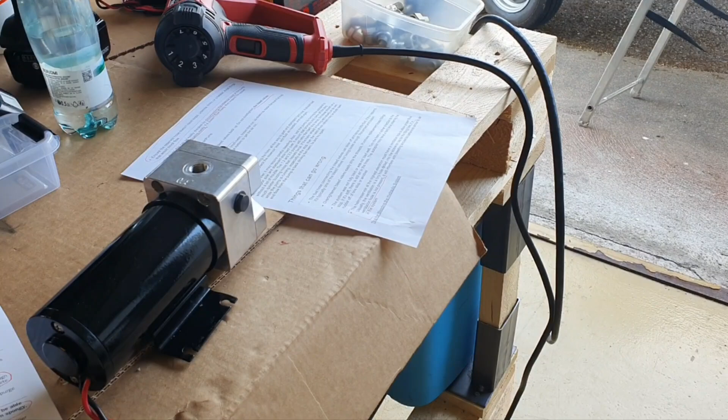Two options, that's it. So I will show you unique, let's say, content. I don't like to call my video content because I share really good information for free. So, content from different manufacturers of the pumps, and also about the rig I did myself for easy bleeding.

So let's go. At the moment I have several videos in this playlist. I'm still talking about the subject, so listen. For example, if you don't have autopilot, you just have a steering system, I have a video where I tried with the basic SeaFirst user manual procedure, and I didn't succeed. So it's quite a bad procedure in the SeaFirst manual.

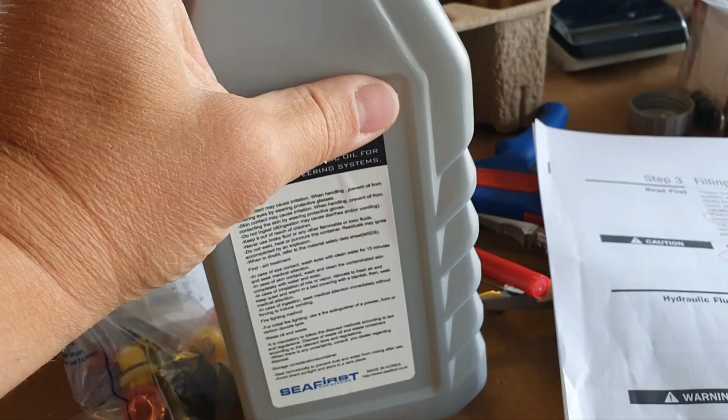And I found that it should have been done quite differently, for example, when you read the SeaStar procedure. Anyway, it didn't work. So you can watch that video. Probably you have the same problem.

The second procedure was when you rotate the wheel until the lock, and then poof, and the air goes up. This procedure did help me to remove the air, and everything worked perfectly. So if you don't have autopilot, probably that will be enough. Also watch that video. I don't remember the names, but you will see them in the playlist with this one and in the description, I believe.

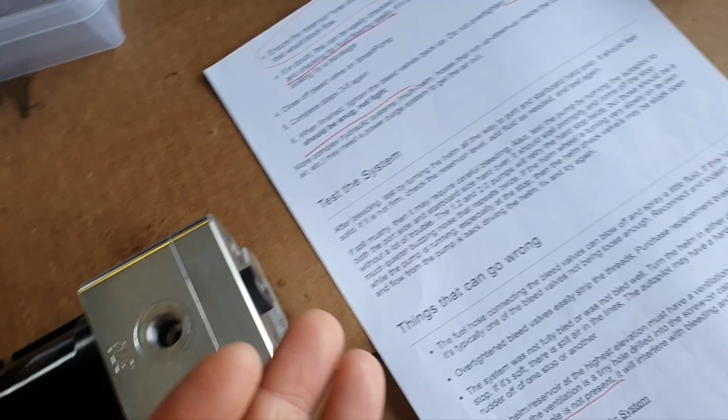And now we are talking about the third option, where I decided to build bleed valves on the pump, this is a Raymarine or Hy-Pro Drive pump, myself. For example, some SeaStar pumps have bleed valves. And I decided I will do my own, as well as rigs for easy bleeding, and that's what we will consider, but we will consider even more quite important stuff.

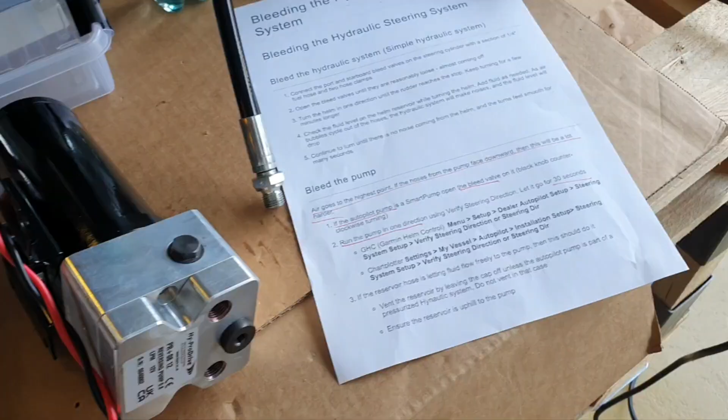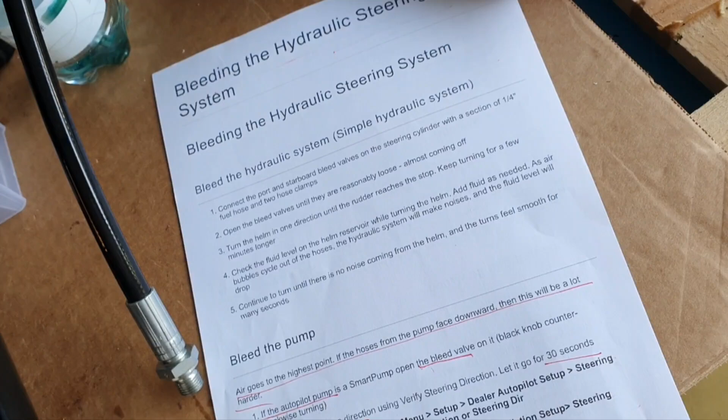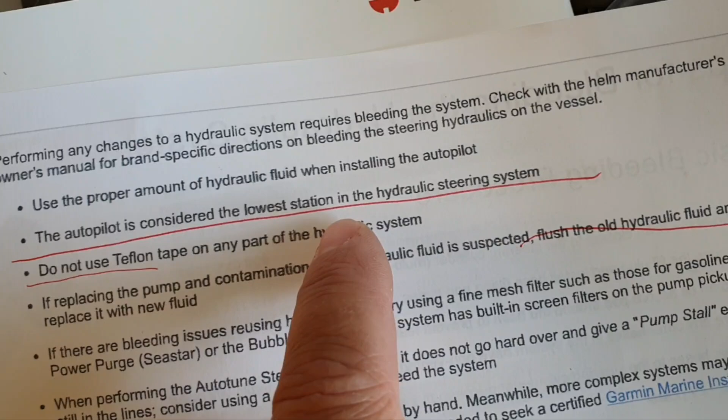As I mentioned, I collected experience from different manufacturers. This is from Garmin, this is from SeaStar, again from Garmin, and some advice from the manufacturer of the pump that I haven't seen in any instruction. First of all, the interesting point: in multiple station systems, start with the lowest station. That is SeaStar, and then we read in Garmin that the autopilot is considered the lowest station in the hydraulic steering system.

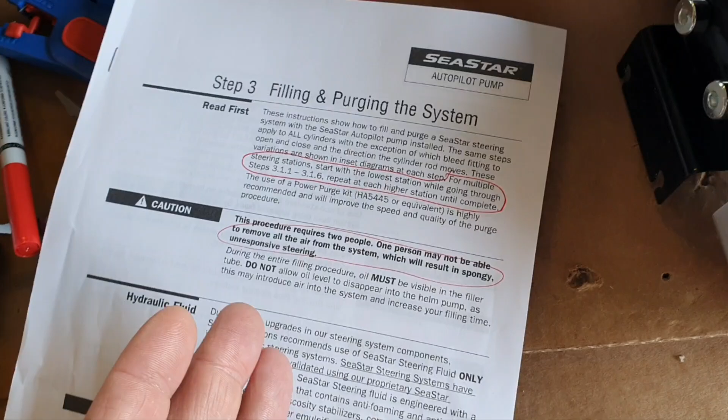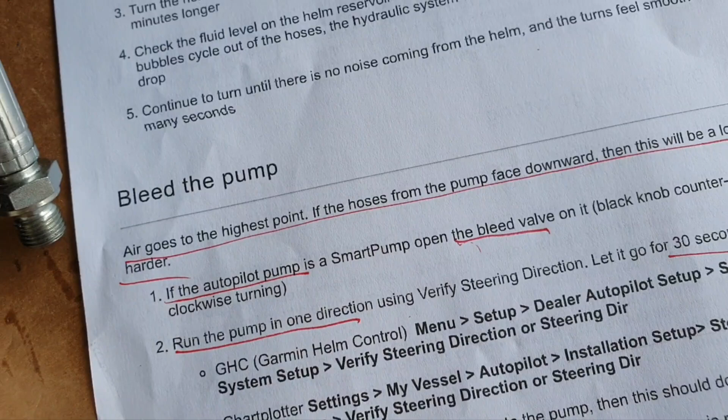So could you combine these two facts? We should start bleeding from the autopilot, and SeaStar has bleeding valves, this one doesn't, so I want to build my own. Okay, the next interesting point. Air goes to the highest point. Everyone understands this, but that's quite interesting. If the hoses from the pump face downward, then bleeding will be a lot harder.

In my initial design, if you watched the previous video, you have seen my installation was like this. The hoses go that way. It means that if there is some air here, it needs to go down before it goes up. It's much harder. So in the new system, I'm building the hoses something like that. So two quite important things.

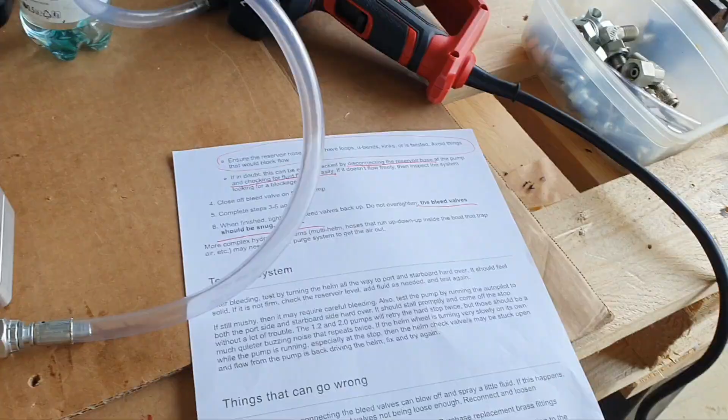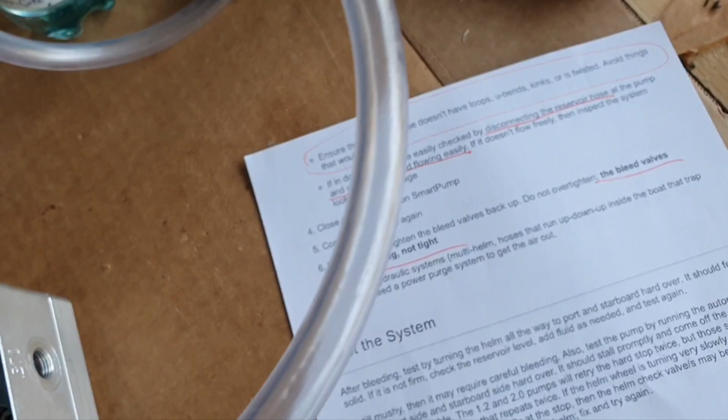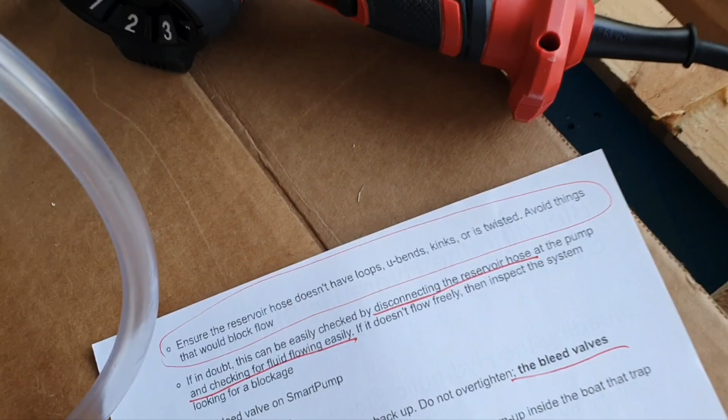Guys, I think you know about the reservoir line. It is in every instruction, and this line is not pressurized. This time I decided to use a transparent and bigger diameter line. We rely on gravity here. The liquid from the helm pump goes by gravity to here, and in any instruction you will see: ensure that this line doesn't have any loops, bends, etc.

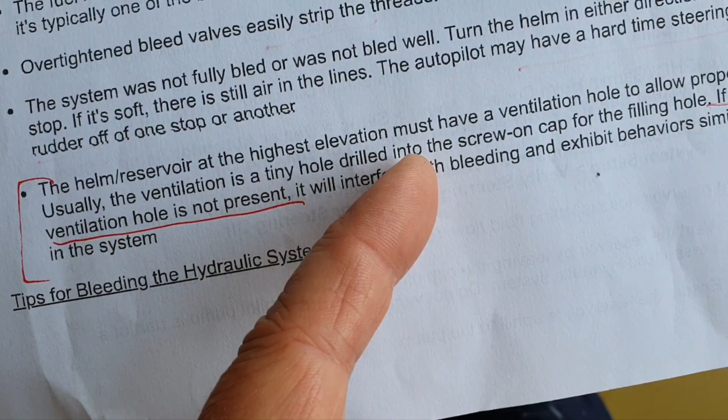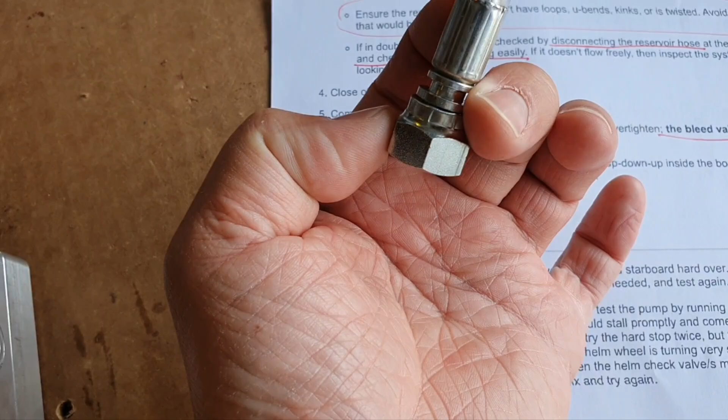This pump is convenient because you can change the position of the reservoir line, and I changed it here, so I will have a good line. And Garmin also recommends how you can check it. Oh no, not that one, sorry. Here, you can disconnect this hose and see if fluid goes easily. So I will disconnect here, and then I will see that everything goes from the helm pump. We will see. More things.

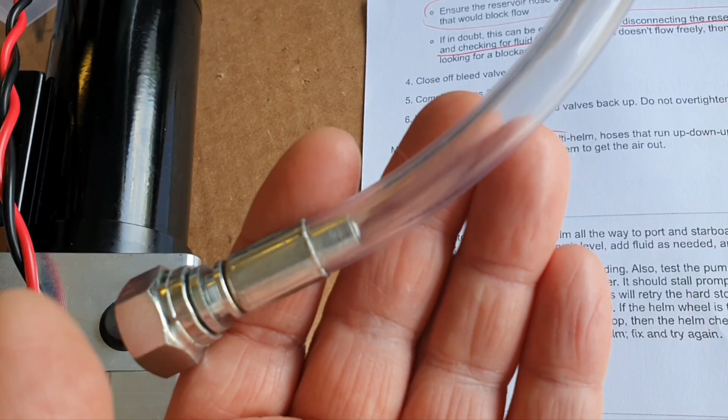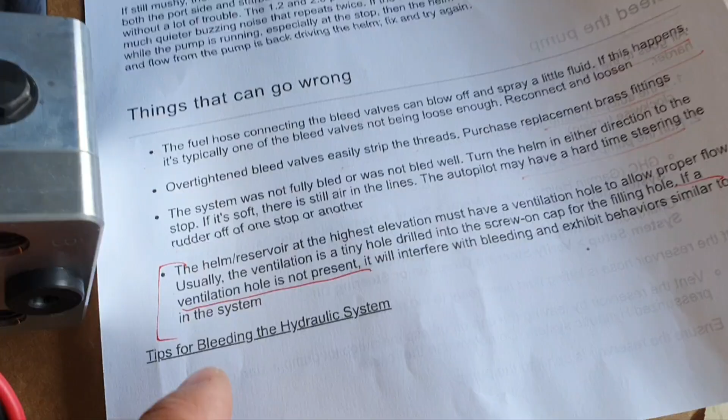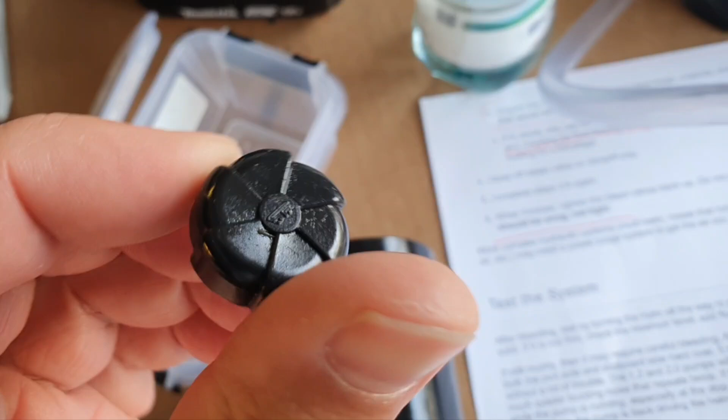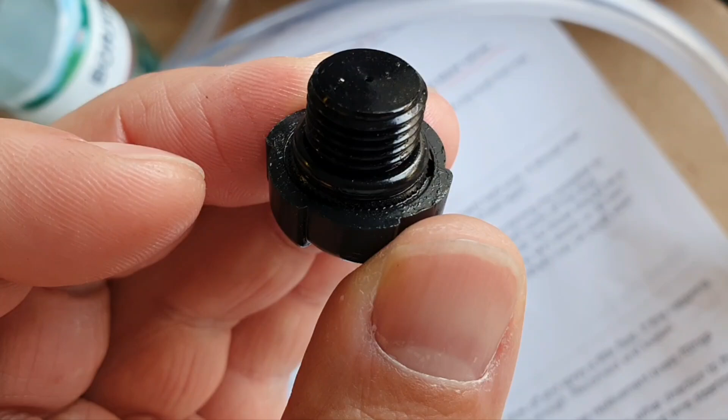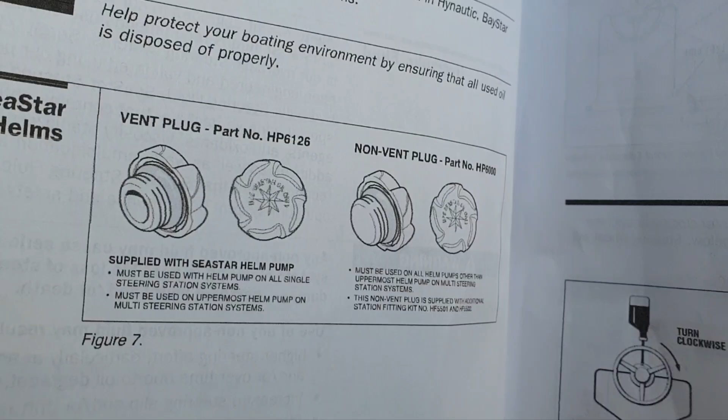No, not this one. So, guys, next: the highest reservoir should have a ventilation hole, and SeaStar supplied it with this cap. The hole is not here, that is the hole, and you can see it on the sides in a few places. So this is ventilated. It should be just on the upper station, not on others. On other stations you should have caps without ventilation. SeaStar also mentions this. It's very important.

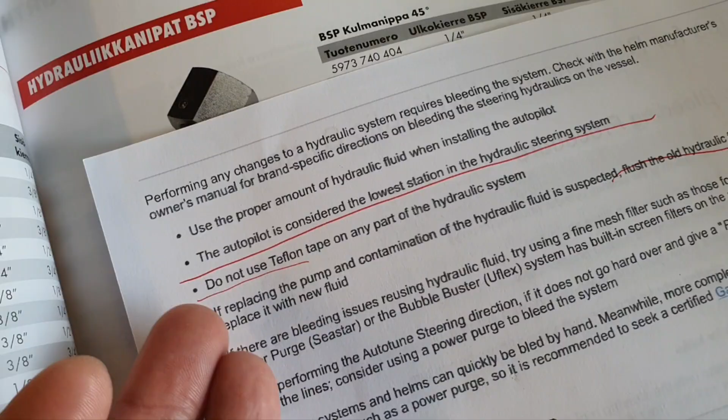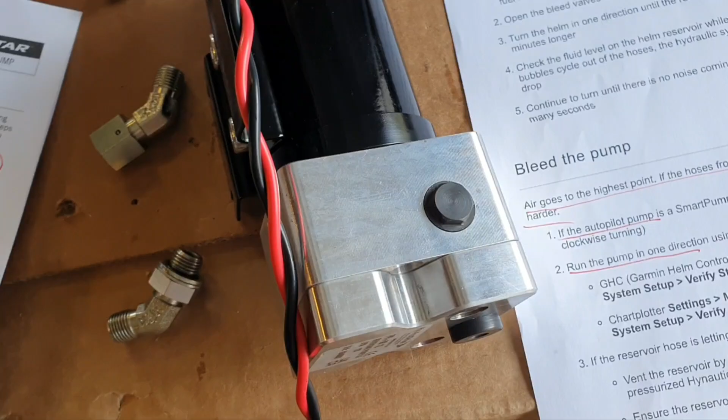Guys, one more. Again and again, don't use Teflon. Forget about this. You should just forget about this stuff. So look, guys, for example, in the Garmin procedure you read to open bleed valves on the autopilot pump, there and there. In SeaStar you also read about the bleed valves. You don't have it here on this Raymarine or Hy-Pro drive. So that's why I built my own, and I will show you now how.

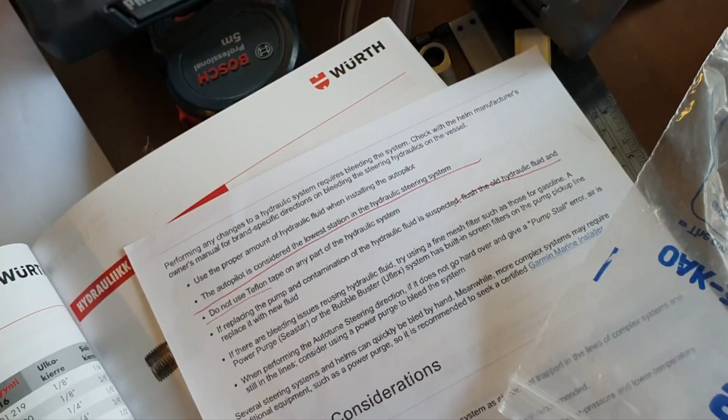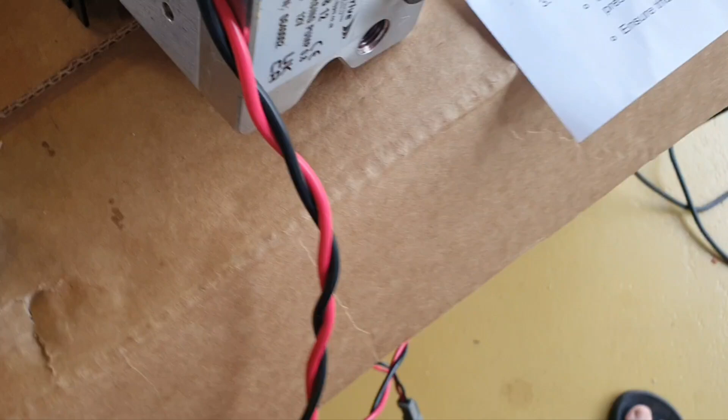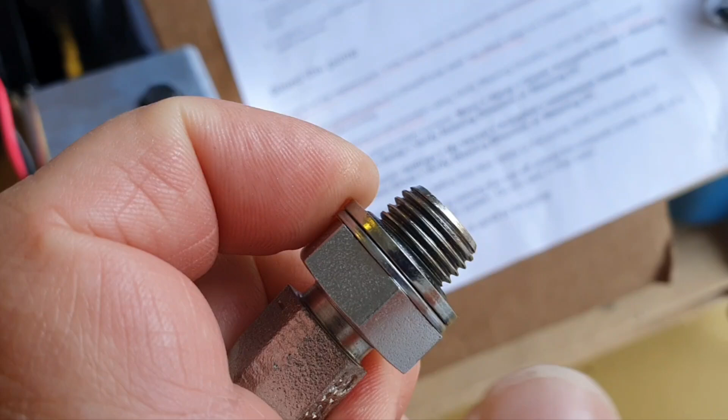So it is BSP 1/4. You have different kinds of fittings for this, but they are restricted to some common fittings anyway. You can get anything, and basically the sealing is happening metal to metal with this cone shape. So it's here on the hose and here, or in any other part, for example here. So you have several options. Or in case of the flat surface, the sealing is with this bonded washer, and there is also a cone there on the thread.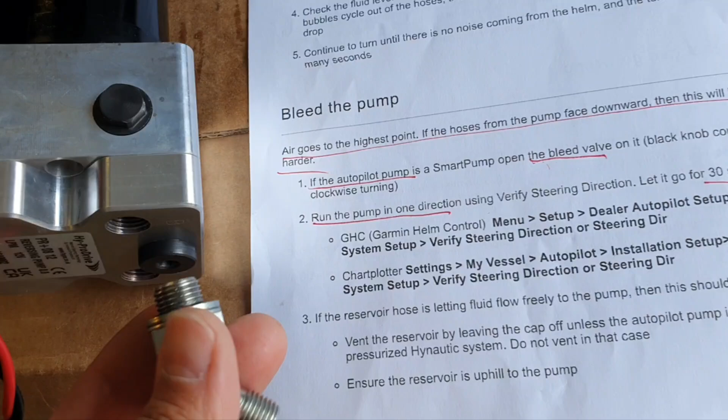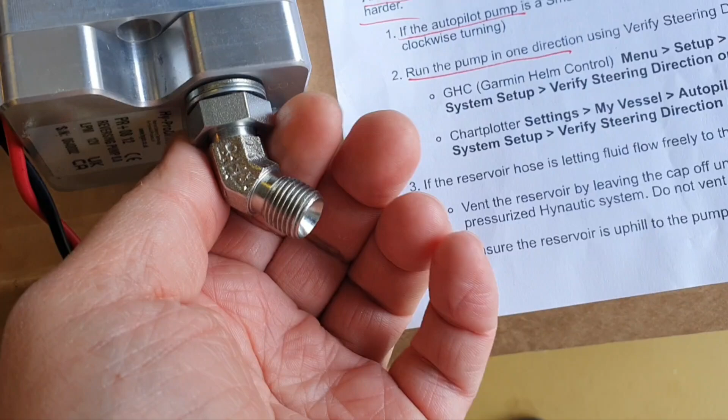So we should first start with a sealed connection from here. Here we can only use a bonded washer. How do we start then? We don't want any hose directly. So we start with either 45 or 90. 90 is bad, it's always bad. So we start from 45, this type of fitting you can get. And you need this nut because you can then decide where you put it. So remember about this. So we start with that one.

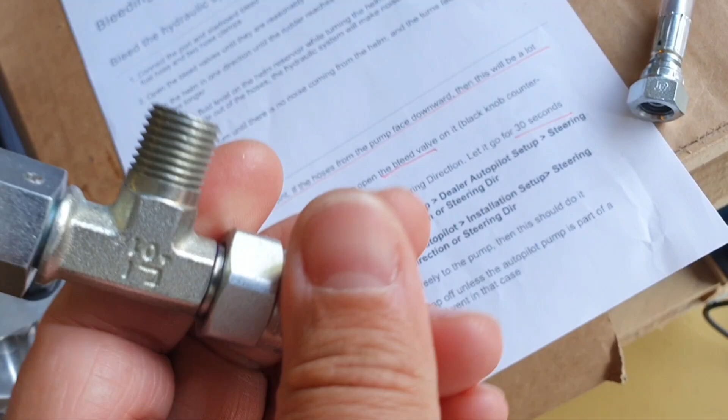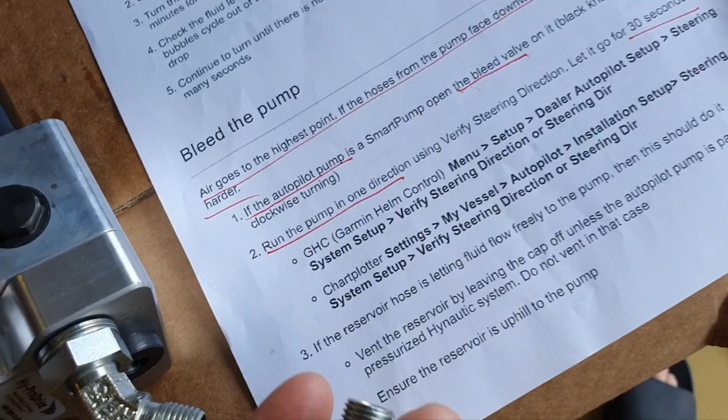And then we need a T connector. That is already with the valve, I will get back to this soon. T connectors always have 90 degrees. You can get all females, all males, or like here, female, male, male. You cannot get female here and males here, and you cannot get other options like two females here, for example. But we are okay with that one. So we put it here. It's metal to metal, so that is designed for this BSP.

And then I was thinking how I want to build a bleed valve. I was thinking first to build it here, because then I don't have 90 degrees for the hose, which is good, but the hose would be like that. I didn't like it much, so I decided to make it this way. The bleed valve will be here and the hose will go there. 90 degrees, unfortunately, but it's okay, I hope so. And we will have the hose from here, not that transparent one, but another one. It means the air is more or less better than it was this way.

And now about this bleed valve. I considered several options from the car industry, the ones they use on the caliper, but I don't have time to wait for them, and it would be difficult to match them with this BSP 1/4 standard. Should I call it quarter? Okay, so then I found this one. It's, I don't remember right now, ISO standard. I will put it in the description. They use this in tractors for connecting different equipment.

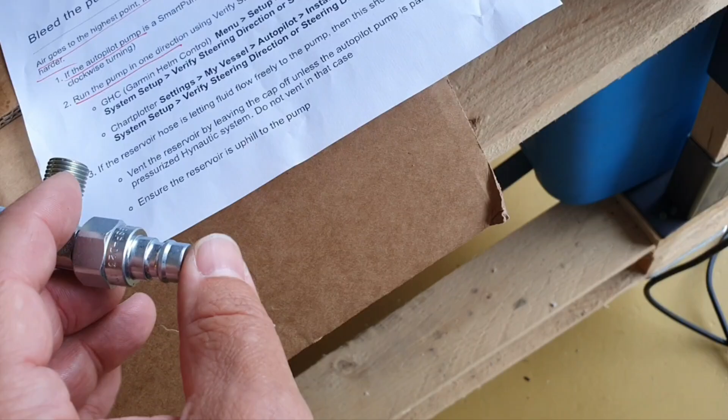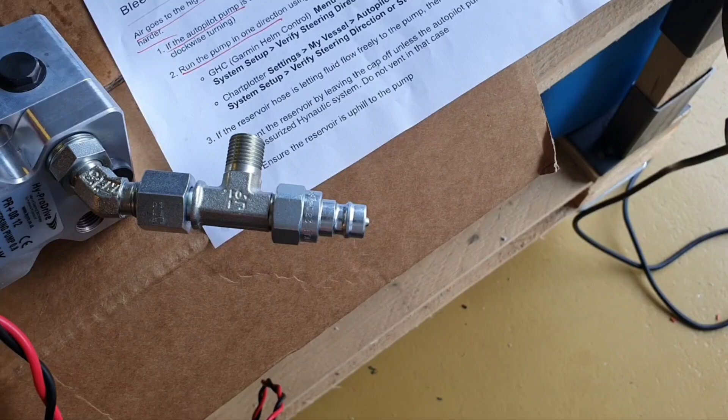The responsive part is this one, but we will get back to this soon. So look how nice it looks. You can bleed the system through this one later. I think it's quite a good solution. I hope we will see it. Okay, let's now talk about this one.

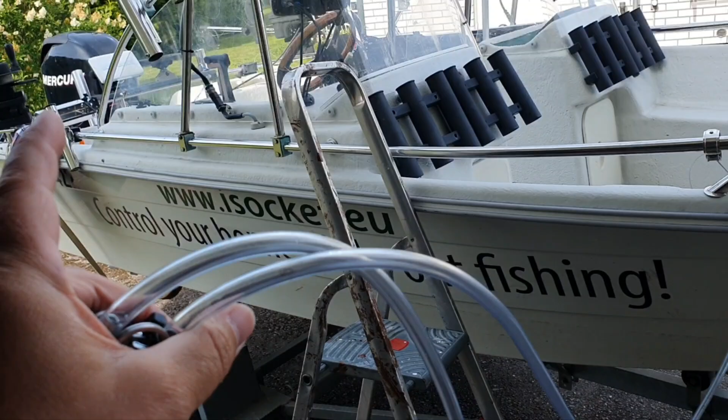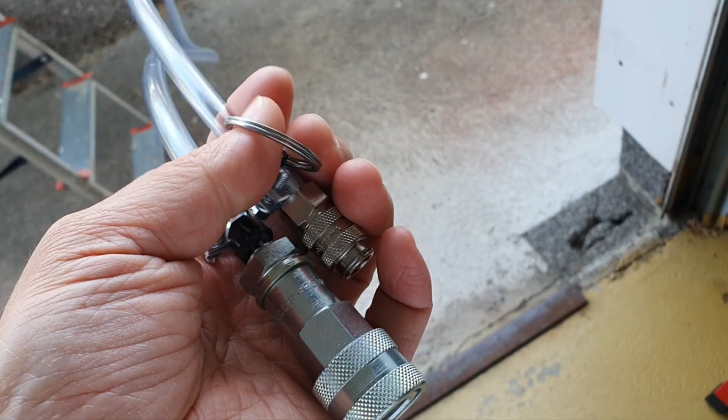So you probably know the procedure where you lock both bleed valves on the ram. Well, it's not so good a procedure, especially when you have the autopilot. Then you probably know the classical procedure with one side, one bleeder open, and so on. So we do this classical one, but we use a simple rig. This is for connecting here, because I built it this way, and this is for connecting on the ram. This is Rectus 21. I have a short video about it.

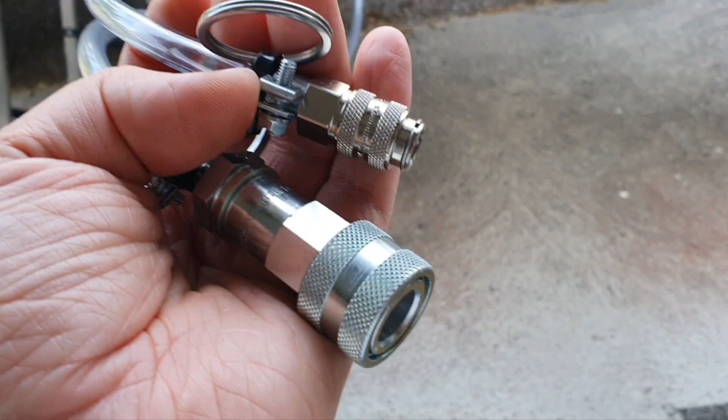So I couldn't make Rectus 21 here, and I couldn't change the bleed valve there. That's why I have two different ends, and this pipe is locked, nothing leaks from here, so I can connect either here or there and nothing will leak. The oil will stay here after disconnection. So that's the point. Let me share more details with you.

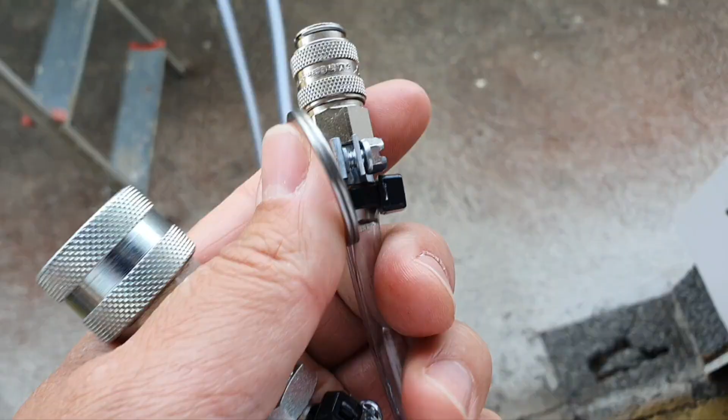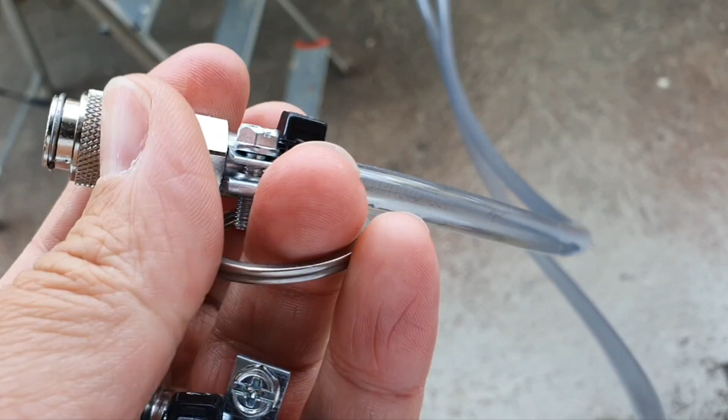So this is Rectus 21 to the hose, in that case to the 8, but the hose is 6. The smaller hose is better in that case, less oil used there. And then this crimping, as I explained before, is the better one. And here with this cable tie, the ring for hanging this up somewhere, so it should be quite convenient. On the other side, this part you have with BSP quarter. That's why you then use a bonded washer, and then male 1/4 to the hose.

In that case I use 6. So this is a component that you need to build. Then you have this one. It will be the perfect solution for bleeding. Why that long? Because you can plug it to the ram and return it directly to the bottle, or to the autopilot and to the bottle.

About the bottle, I don't go deep because it's covered in other videos, so you can watch it there. So this one, you will soon see the full setup. And when you need to push the oil from this tube, or just fill it into the bottle, you need to make this too.

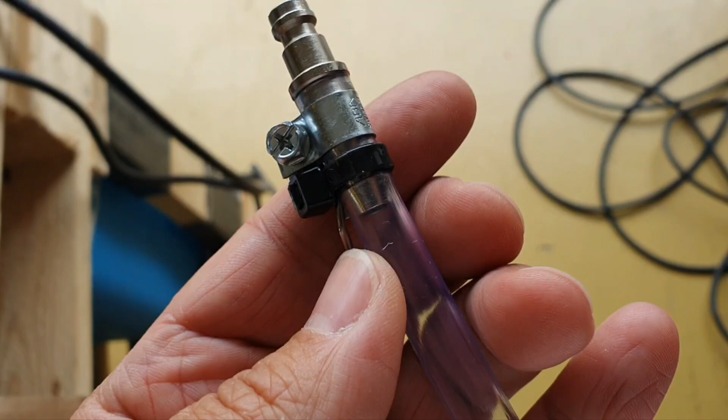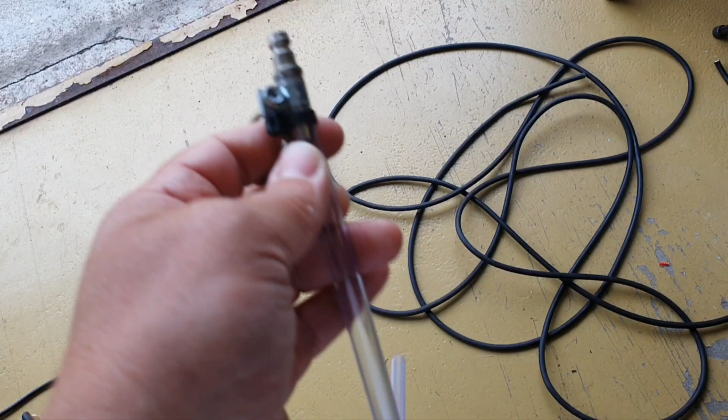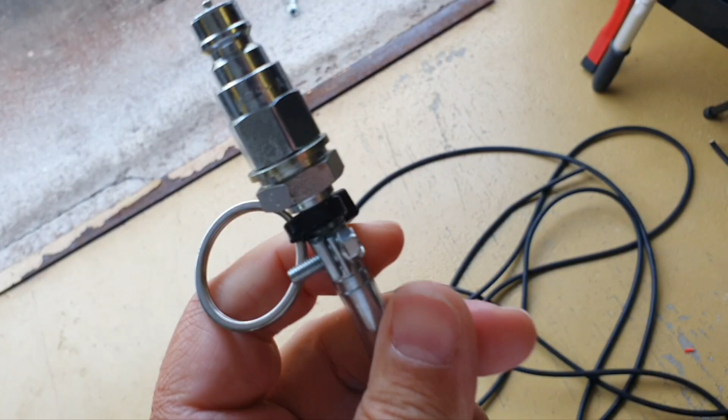So this is for Rectus 21, and I told you that it's not sealed. So Rectus 21 to the hose, and open it. You put it and the oil goes wherever you wish. Or if you want to push this, you also need to unlock the opposite side, or if you use the opposite side to the bottle, then you use the same valve as we installed on the autopilot pump, then the bonded washer, then 1/4 to the hose. I hope it's clear.

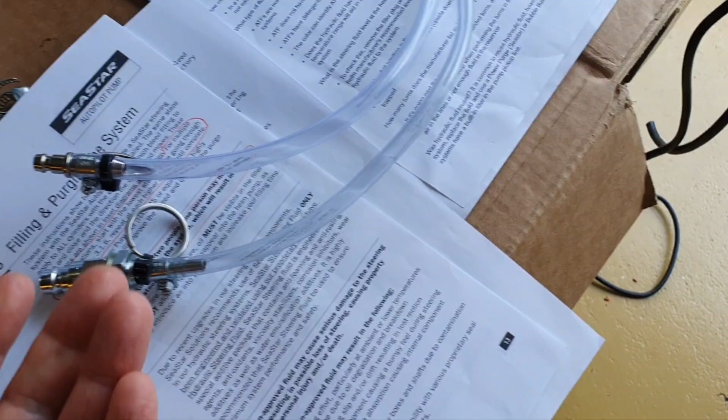Like they are clear. And look, I covered the reservoir pipe with this sleeve to protect it from the sun, but you can still open it to see the bubbles.

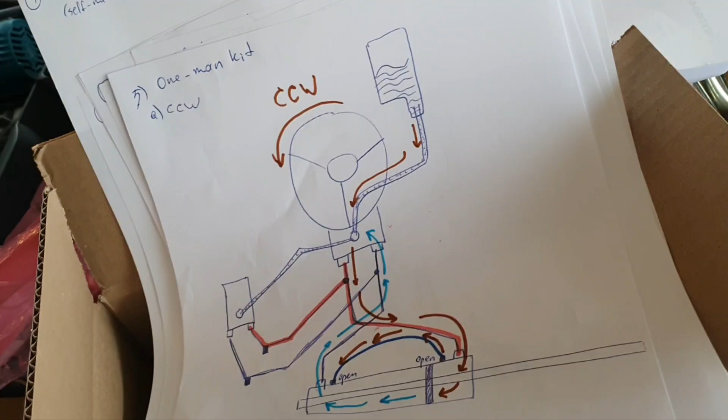And now I will make together with you a kit that I called the one-man kit. Actually, you can buy this kind of kit for the one-person bleeding procedure, and watch my video about all procedures, including that one. I will make my own rig, because this Chinese junk that you buy leaks.

So I bought the original Rectus 21 Parker. They are expensive, about 20 euros each. And one, I guess it's also made in Germany, still from Amazon. But at least I think that is also one of the professional ones.

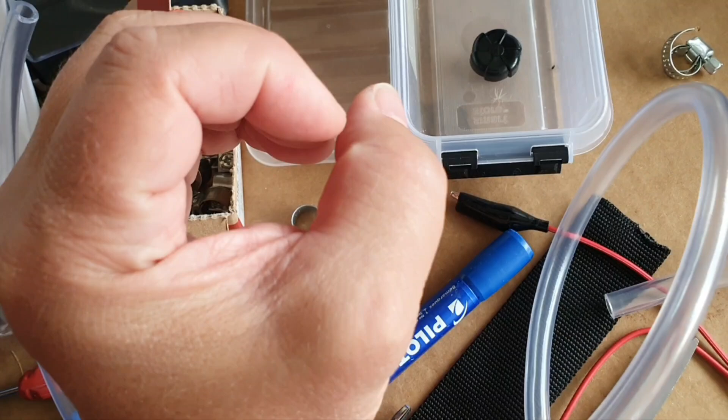And we need a hose, a transparent pipe, and we need something that will fit tight, because the system will be closed and under pressure. We don't want this to blow out. We don't use that junk. We use this kind of crimping clamp that does equal round clamping, not that one. So I will do it now and just show you the result, because I explained everything.

And guys, don't buy this Chinese junk from AliExpress, Amazon, eBay. It will leak. The most difficult part is to find the right hose pipe. So I made it, and how to use it, watch the video about the bleeding procedures, all kinds.

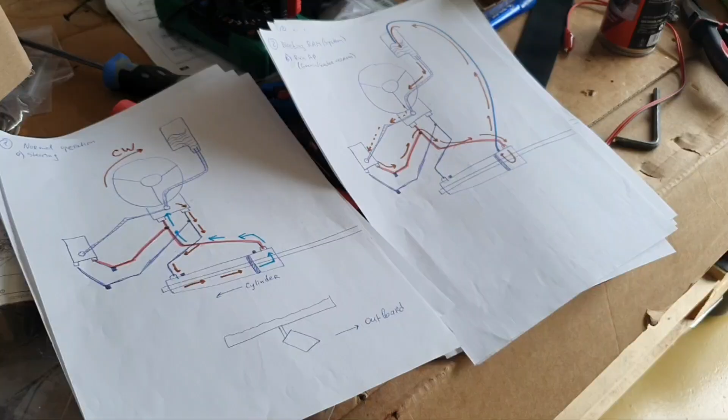In the beginning of this video I promised to show different bleeding procedures, and you can see I even have many drawings to explain them. But when I started this, between football and walks for 2 days, I collected so much material that I understood I need to divide this into 3 videos.

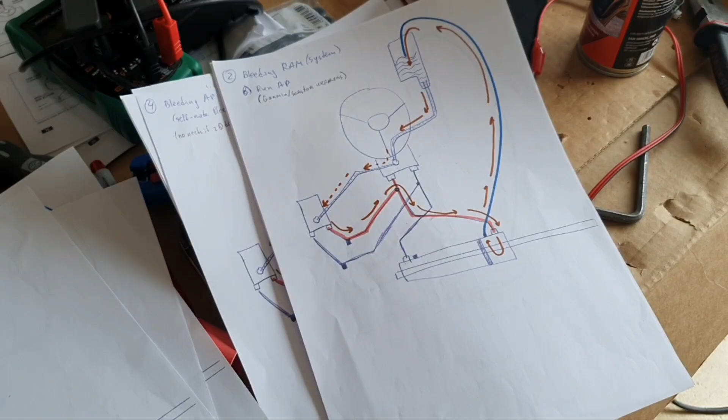So this video is about very useful rigs that you can make for yourself, especially this stuff for returning the oil to the same place, and also about things that you need to consider when you build a steering system. It is a very important part, I believe.

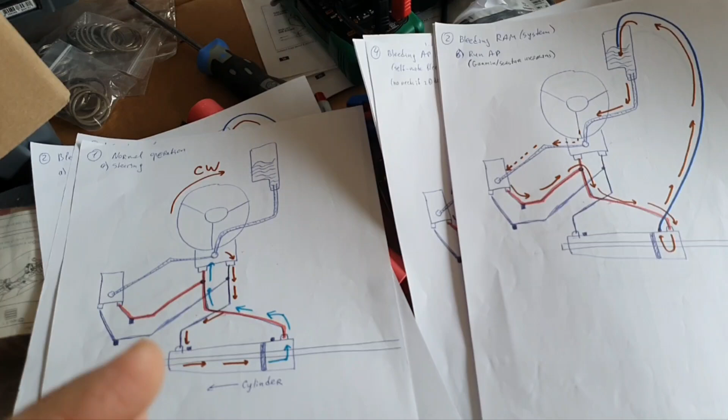But the next part will be extremely important, about all possible bleeding procedures, different types that you can apply when you have hydraulic steering, with autopilot, without, with problems getting your lock-to-lock turns correct, etc. And also about the one-man procedure that leads to this stuff.

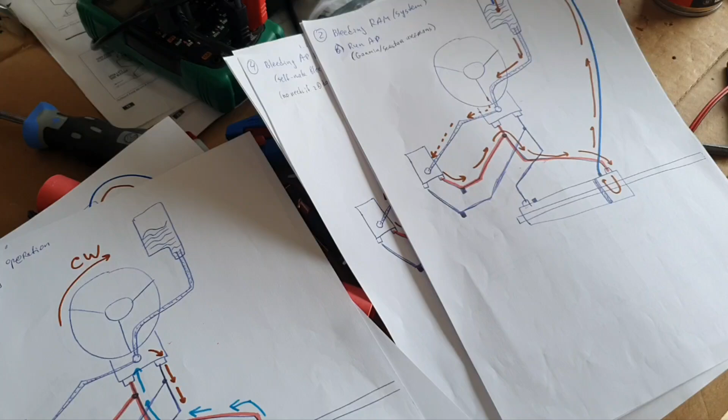And guys, also with this video I state the fact that the system is done perfectly. It's not for you, it's for manufacturers and dealers who usually blame customers when something happens. They usually tell you a professional should install things. Who is a professional? A guy who does this for money, who got a very specific education in this subject.

How many hydraulic guys have you seen in your life who have an education from a hydraulic university? These guys are guys with experience, or in most cases who just read and analyze information like this. I'm an engineer, electronic and mechanical, not hydraulic. And I understand the things.

And I show everything in my video. So if some manufacturer or dealer later claims that it's my fault, they can just watch this video and see how everything was done.